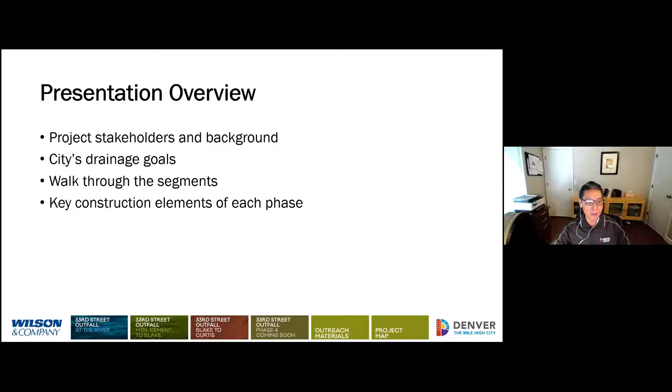There are numerous stakeholders for this project, and also a large number of project team members who made this project success and possible.

Drainage deficiencies were identified in the 2009 Denver Storm Drainage Master Plan. As you see on this drainage map, the total drainage basin is about 4.5 square miles. This map has basically 2 main basins: one is Lower Platte Valley, on the lower half, and the other is the 36th and Downing Basin, on the upper half. The basin is basically fully built out, with older residential neighborhoods in the upper basin and commercial development in the lower basin.

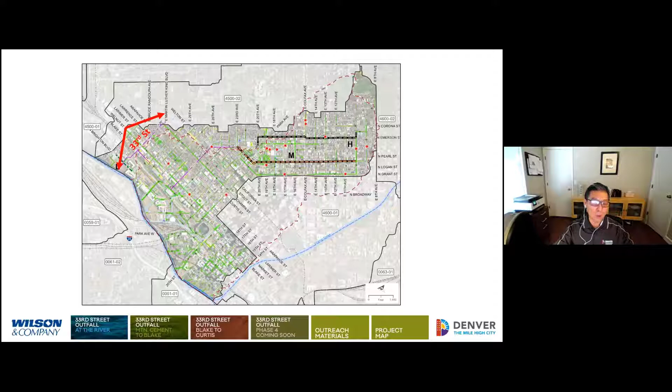As you see on this slide, some of the existing outfalls are 100-year-old brick systems, which are relatively deep. The detailed brickwork is quite impressive, and they're in very good condition, but they are majorly undersized for today's flow requirements.

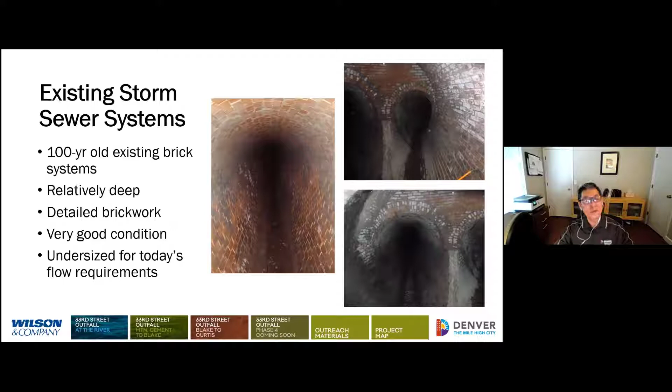Every project has a goal, and this project is no exception. The goal for this project was to adequately address the areas where significant flooding occurred, and to upgrade the level of drainage system service to a 5-year capacity.

The challenge was how to determine the overall most feasible outfall alignment navigating through the heavily urbanized streets.

The drainage capital improvements were proposed again in the same Denver drainage map, and several major outfall interceptors were primarily recommended because the existing lateral network was already established. As a result, 33rd Street outfall was selected as one of the major outfalls.

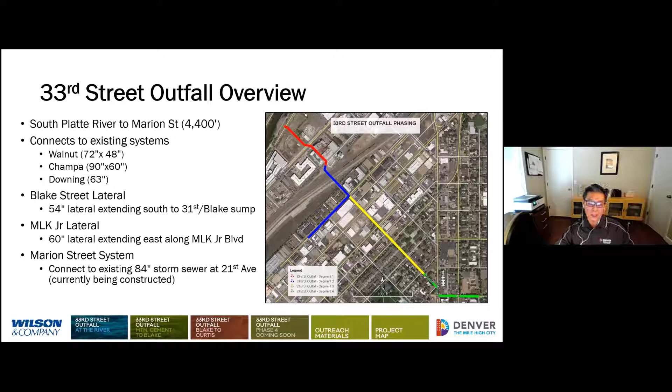In the next slide, Jeff will talk about some of the components and challenges for each phase of the project. Thank you, Steve. Yes, as Steve mentioned, the 33rd Street outfall ended up being the optimal corridor for improvement of the drainage configuration for the basins north of downtown.

That included an extension of the alignment from the South Platte River to Marion Street, about 4,400 feet of corridor. This alignment allows us to connect into 3 different existing storm sewer systems along Walnut, Champa, and Downing. These are all existing brick systems that we were able to intercept flow from prior to it reaching the existing outfall location.

We also had a lateral along Blake Street and Martin Luther King Jr. Boulevard. These laterals were critical to provide relief for some sump areas. Ultimately, the 33rd Street outfall connects up to an existing 84-inch storm sewer using the Marion Street system, which is currently in construction.

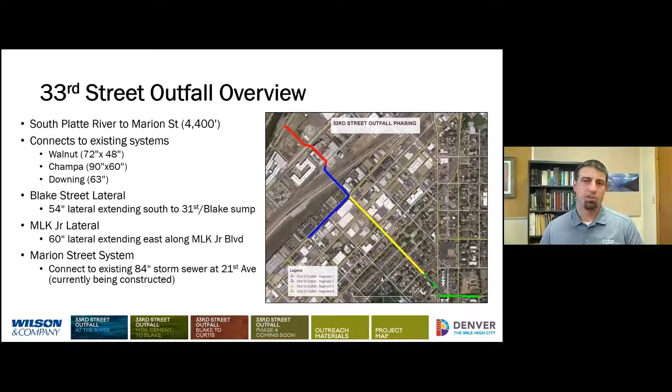The overall project corridor includes a wide variety of conduit sizes, and the primary conduit for the outfall was a 10 by 8 or 11 by 8 box culvert.

We also had combinations of other sizes to allow us to widen and have a shorter structure where cover issues became a concern. We also had a 10-foot diameter Hobas pipe, which is unique in itself, a centrifugally cast fiberglass mortar pipe.

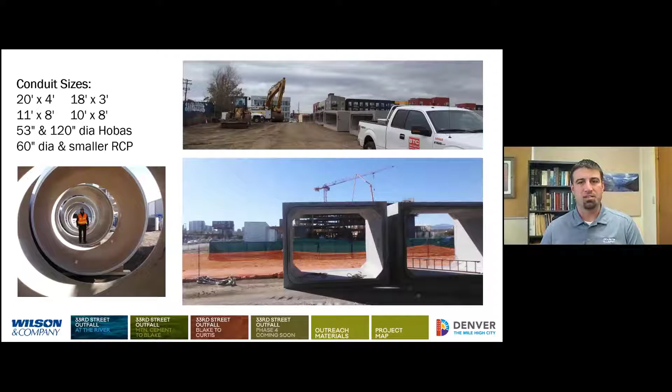That pipe was used for this project in some locations where we had both open cut and, primarily, tunneled sections. Phase 1 of the outfall starts at the river and extends upstream to the Union Pacific Railroad. This area crossed several private parcels, a lot of commercial development, and large residential apartment complexes, which was certainly an obstacle in terms of timing and potential conflicts with existing development ongoing through the area, adding challenges for construction and changes throughout the corridor almost daily.

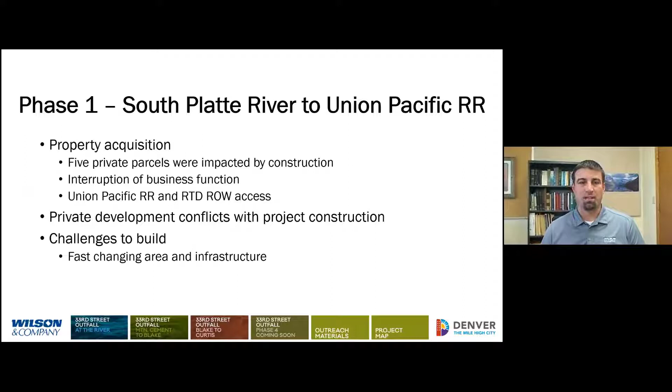As we started at the outlet of the conduit to the river, it was a great partnering opportunity for the city to partner with Mile High Flood District, and the district really took on management and funding of an outfall structure.

And they worked with some of their key partners, Muller Engineering, Stream Design, and Pinyon Environmental, to facilitate construction and design of that outfall.

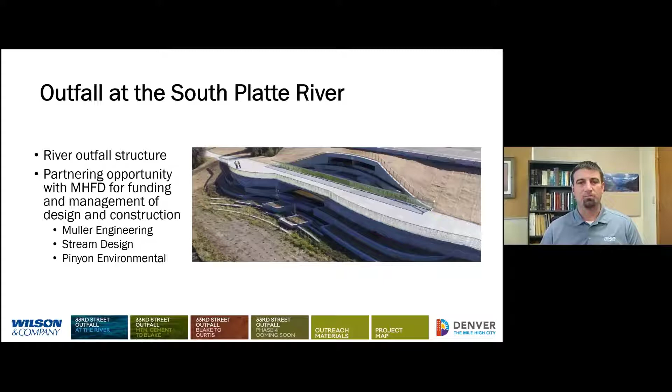As we worked upstream, one of the main construction constraints, which resulted in a large vertical difference between the outfall elevation and the river, were two sanitary interceptor sewers. These sewers vertically were just not able to be crossed under, so we looked at an alternative to raise Arkins Court in this location and actually cross above these sewers after they had been protected.

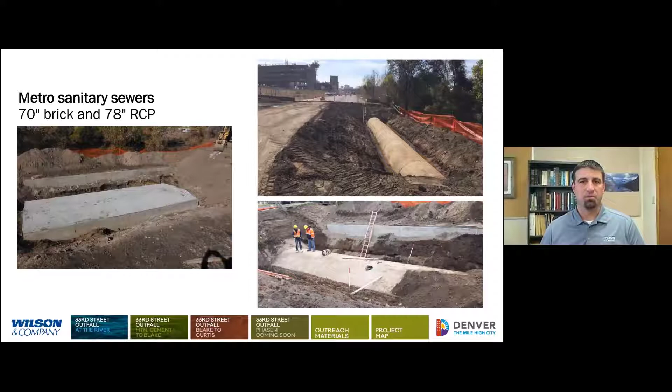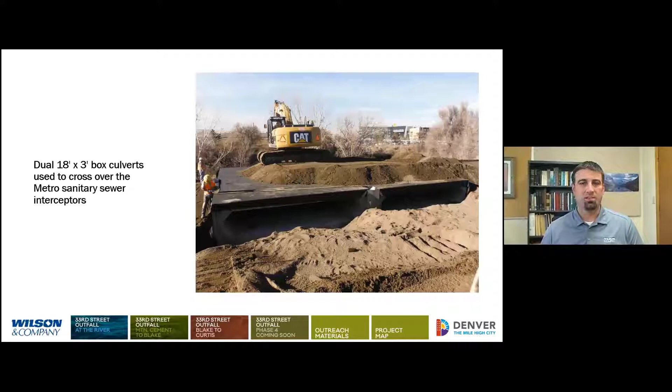To cross over the sewers at this location, the outfall conduit transitioned to a dual 18 by 3 box culvert structure. This allowed for a wider and shorter structure to discharge to the river, and also allowed flow to dissipate and spread for easier energy dissipation at the outlet structure.

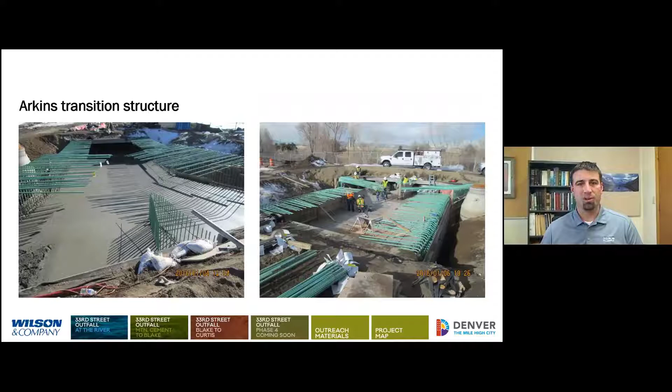As we worked upstream from that transition, the Arkins transition structure was a combination transitioning from dual 18 by 3 boxes into a 20 by 4 box culvert. This was one of our first transition structures along the corridor, with a very large footprint to provide a smooth transition and a very shallow cover condition.

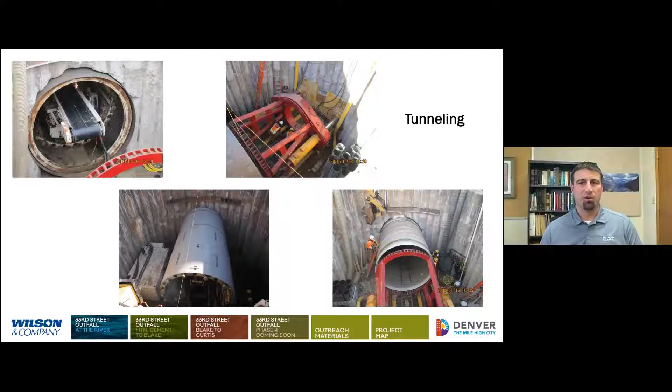As we worked further upstream at Brighton Boulevard, we began one of our first open cut and tunneling segments. This tunneling segment had a 10-foot diameter Hobas pipe that was jacked from the Brighton jacking pit to the east, constructed along a very narrow private development corridor.

The impacts of working through this type of corridor meant the contractor was very tight on space. We had a 30-foot easement in place due to limitations on existing structures, and also the planned construction of a hotel. So we had a tight corridor as well as a very narrow window of opportunity to get this alignment constructed. The contractor did a great job working with the city to make sure this was accomplished.

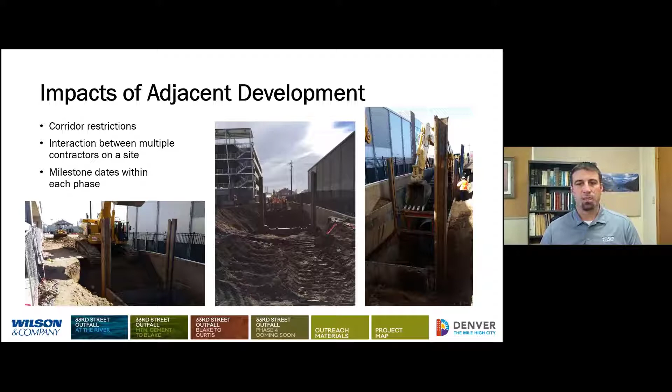As we worked through this corridor, the contractor was able to utilize the slide rail system as a big benefit for construction of this large conduit at depths of 18 to 25 feet through the majority of the outfall. The slide rail system is an active shoring system with rails driven in, and slides placed between the rails as excavation occurs, then advanced down as material is removed from the trench.

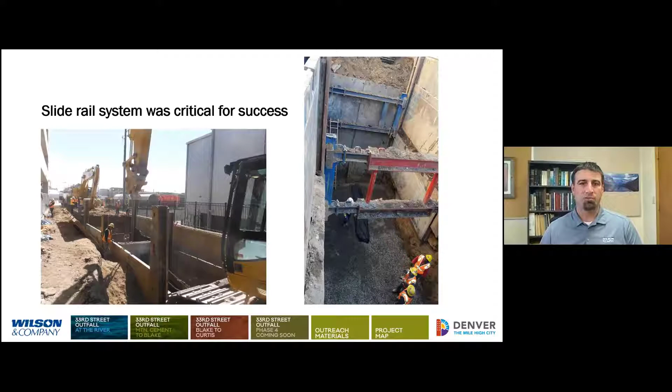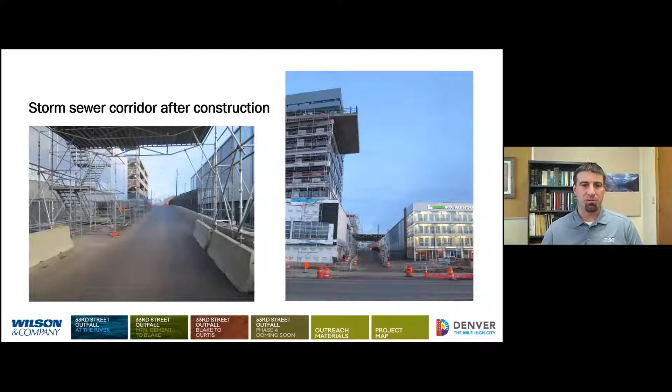As we moved east, phase 2 of the project included extension from the Union Pacific Railroad to Blake Street, including crossing under the railroad. This segment has four individual tunnels and was unique in terms of working near the Coors Field north entrance parking lot. It also was an area where public involvement and outreach became critical as we worked around apartment complexes and smaller individual businesses. These challenges included delays in getting permits in place from both the rail and other entities throughout the area.

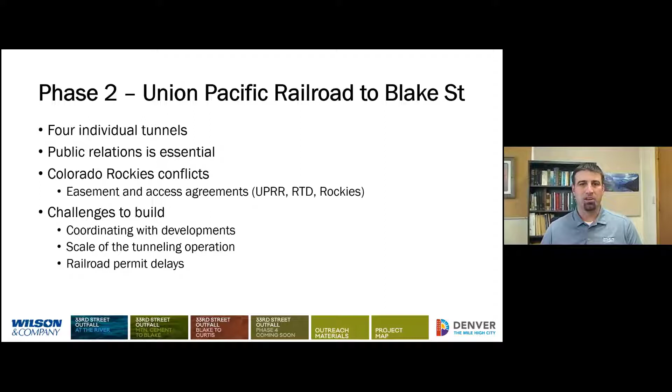As we worked on crossing the railroad, the first component was for the contractor to construct a jacking pit for the tunneling operation. This was a large structure that allowed for placement of rails and jacking equipment to extend the 250-foot tunnel underneath the railroad.

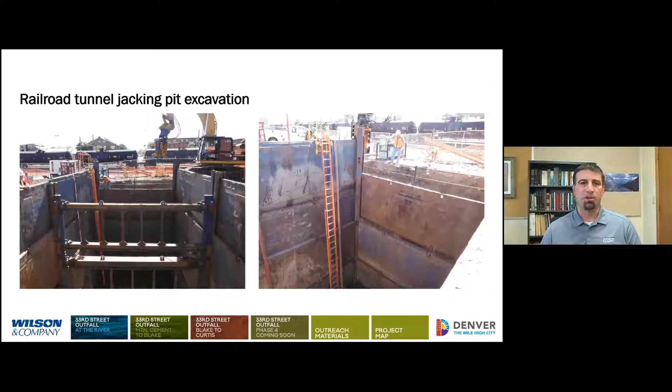The first step in that tunnel system was to provide a grid of horizontal bores. Nine horizontal bores were extended out along the tunnel alignment, primarily focused on identifying any potential obstacles or material that could cause a delay to the tunnel, or potentially a tunnel failure.

Ultimately, two 12-inch steel pipes were also inserted along the bottom portion of the pipe as guides, and that 10-foot diameter tunnel was advanced using those rails as guides for steering. The tunnel ultimately extends 250 feet across the railroad.

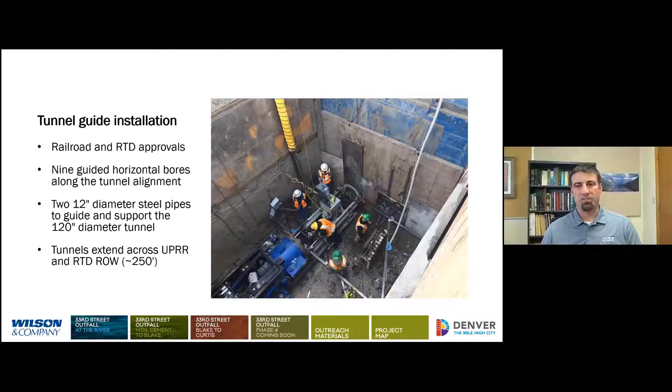The tunneling head was made of two individual pieces formed together in the tunneling trench. As they were advanced, sand shelves were provided on the tunneling head, and hand excavation was utilized to remove material and place it on a conveyor system located within the tunneling heads themselves.

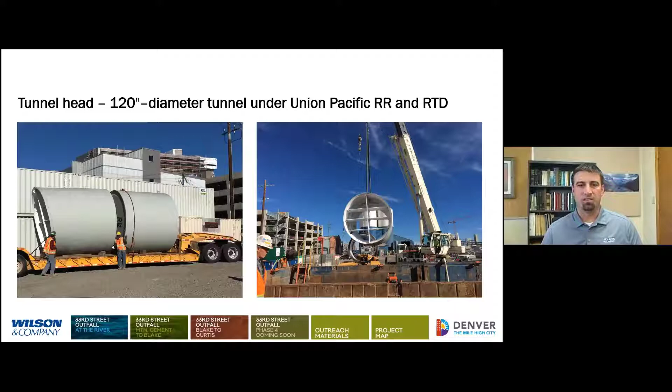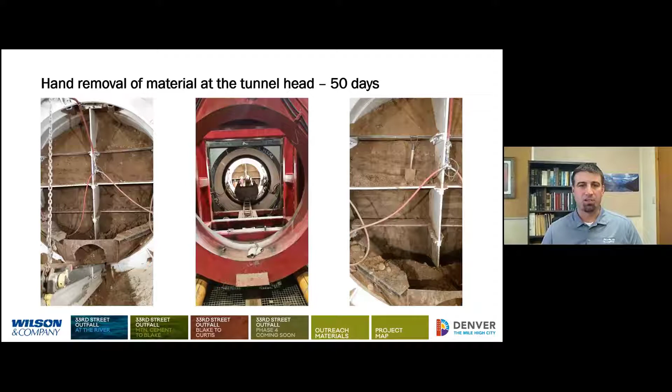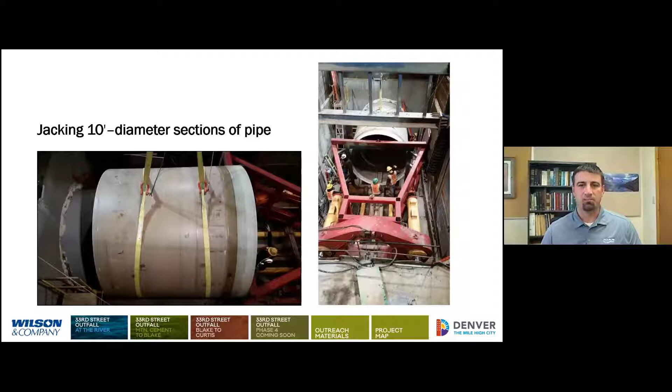As we extend the outfall further east, we cross Blake Street. Blake Street is a major corridor, especially for commuting in and out of downtown Denver, and with this corridor were a lot of conflicts with utilities. Construction of an open cut across Blake Street was not a feasible approach, and as we worked through design, we determined this was going to need to be a tunneled section.

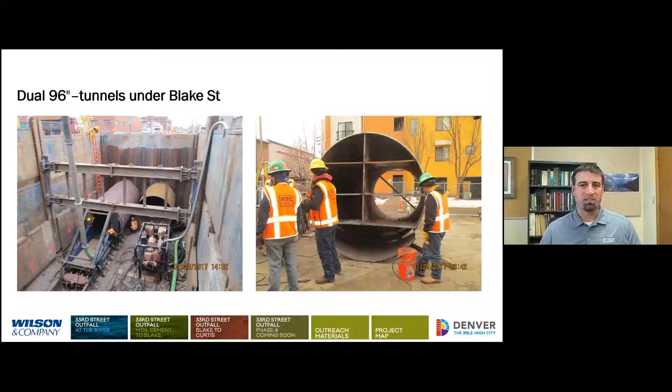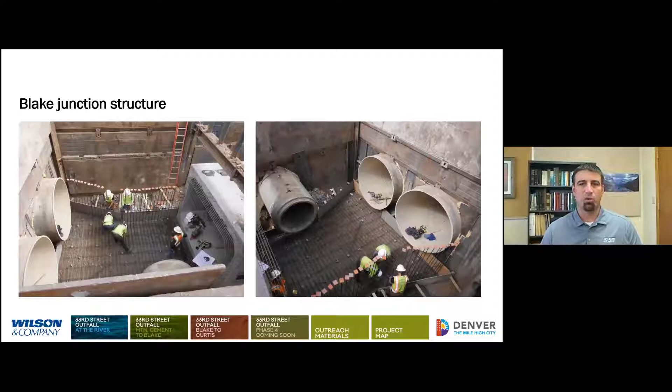On the east side of Blake Street, we had a junction to transition from a 10x8 box culvert to the dual 8-foot diameter tunneled pipes. We also had the connection of a 54-inch lateral system for the Blake Street lateral. The receiving pit for this jacking operation was then able to be utilized as shoring for a cast-in-place transition structure.

Along Blake Street, we also had a segment of 53-inch Hobas pipe that was micro-tunneled. This is the configuration of a micro-tunnel head, and the head being advanced is shown in the right photo. Micro-tunneling is a closed-face system, so the slurry of material is removed from the operation and run through a processing plant.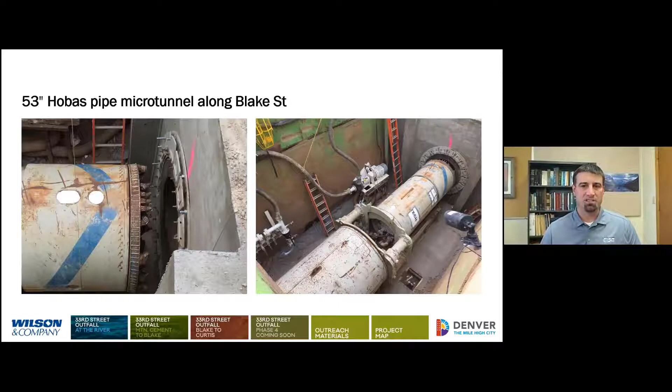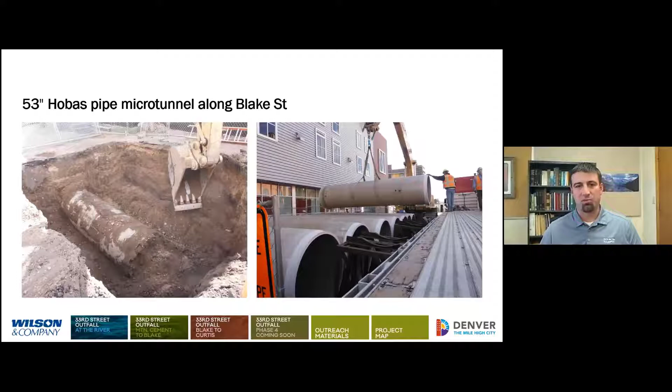The tunneling head on the left is being removed from the end of the microtunnel by the excavator at this point. We were able to advance the microtunnel along the corridor because the adjacent buildings had been constructed after the project was already out to bid. That very tight setback was a limitation for the project, but the contractor was able to make that adjustment and utilize the microtunnel to keep the project moving.

As mentioned, communication for the project was very critical. We had a public relations consultant on our team who worked to update the community, provided feedback at meetings, and also updated and communicated with the city for updates to the city website.

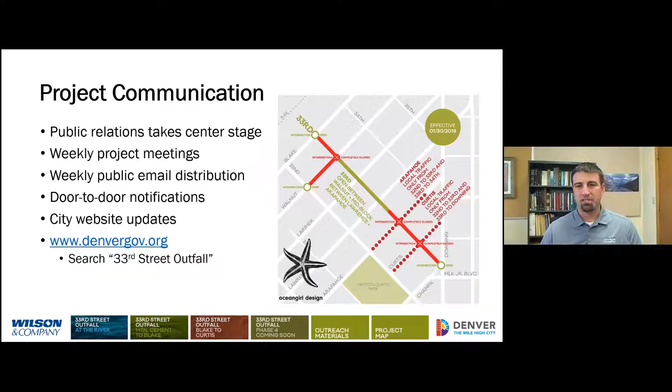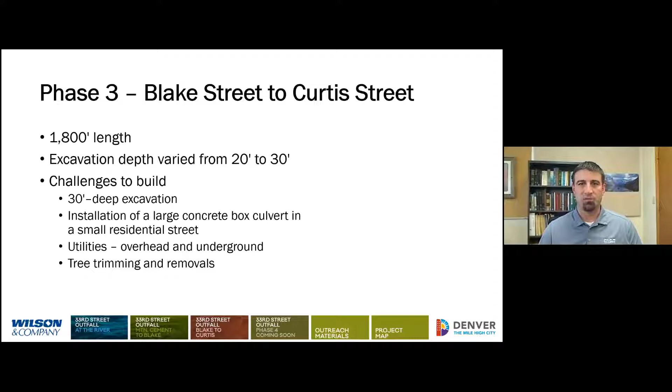As we extend further up the corridor, Blake Street to Curtis Street was the phase 3 segment. This was the longest individual segment of the project, and primarily a straight box culvert installation. The main variation here was that this corridor was extended up to 30 feet deep, making it the deepest segment of excavation we encountered, and certainly a challenge for the project.

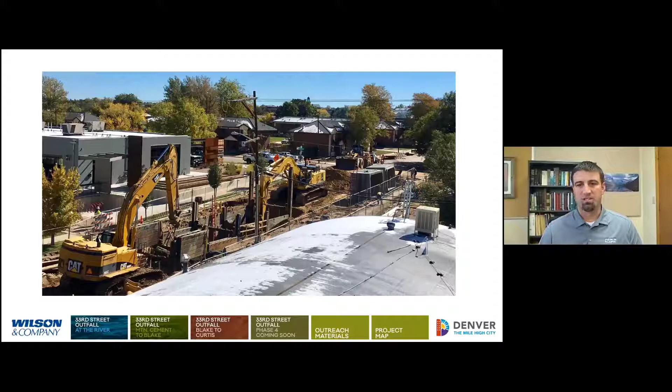As we worked along the corridor, the contractor was able to advance the slide rail system, using a series of components and two excavators, and ultimately a crane, to lower the box culverts in place. You can see the large box culverts on the right side of this photo. This operation was made most efficient with the use of a crane to lift components into place and move materials around.

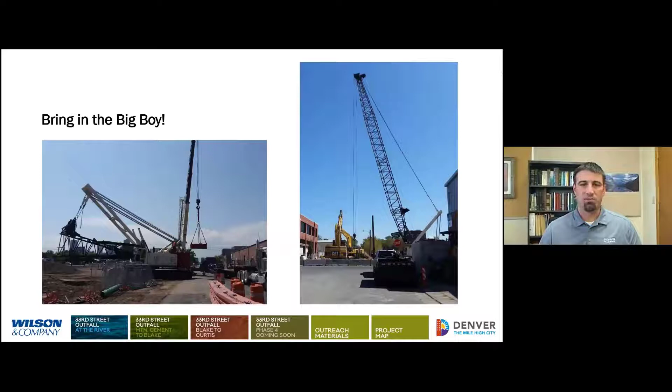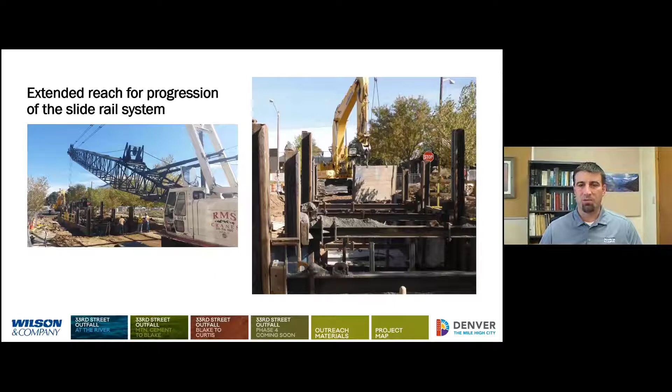This large crane was a huge benefit for completion of the slide rail system. Progressing the slide rail requires a long reach, and the excavators just don't have enough reach for the entire system to work together, including both box placement and slide rail advancing. The crane can move material at a further distance and place those boxes, and then excavators were able to pick up where the crane left off and finalize everything into the final configuration.

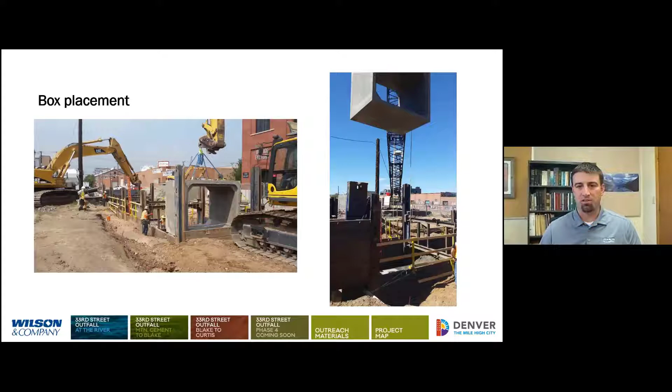As we worked along this corridor, that 30-foot deep connection was a major challenge. As the contractor removed the upper 3 to 4 feet of roadway and subgrade, they were able to install the slide rail system, work around utilities, and progress that slide rail system up the entire corridor. Once they got into a rhythm, they made great progress and moved through this corridor very efficiently, with a lot of material removed and cycled through for this trenching operation.

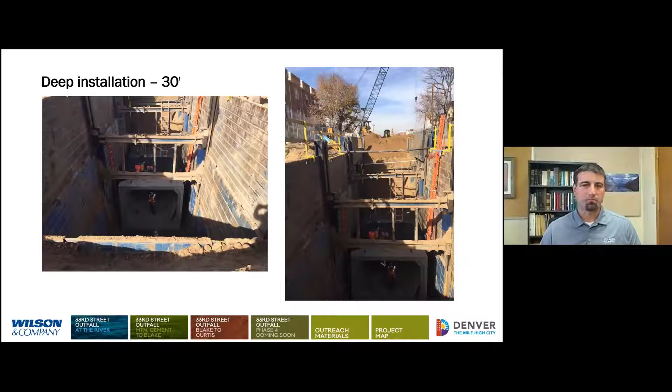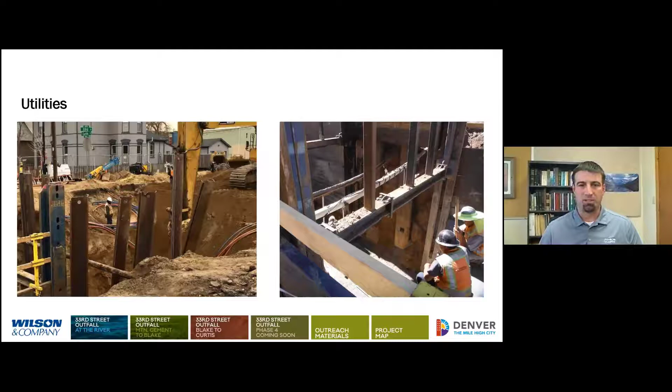As utilities are encountered, there are some configurations on the slide rail where gaps are able to be left in that slide rail, and then additional rails installed. Where those gaps for utilities are installed, sheet piling or H piling was also utilized for that shoring to make sure those utilities were protected and supported.

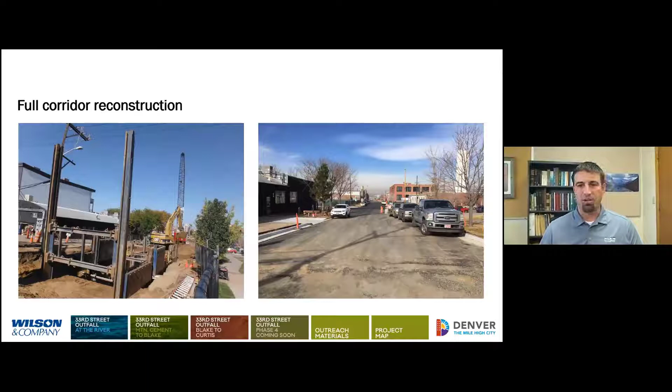As I mentioned, as we work through this corridor, it's a full reconstruction. So we had an entire roadway section reconstructed, curb and gutter, driveways, sidewalk, ADA ramps along this entire stretch of 33rd Street.

Finally, as we work up the corridor, phase 4 was the final phase of the project, including a segment from Curtis to Lafayette Street. This included a lateral along Martin Luther King Jr. Boulevard, and then major storm junction structures at Champa and Downing Street. The main structure is the Downing Street structure, and this includes crossing of a 33-inch sanitary sewer.

Crossing at this location is critical because the sewer had to be suspended to bridge across the excavation during the entire time that they were working on that excavation.

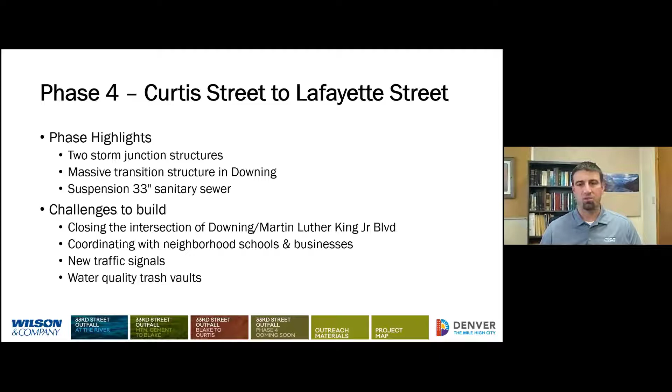The total construction in the Downing intersection included a 10-month window, and this included closures, working with businesses and schools in the area for timing, and also included new traffic signals at the intersection.

We also included trash vaults along Downing, or down Martin Luther King Jr. Boulevard. These trash vaults were really for removal of floatables, and so they were offline structures configured to remove floatables from the storm sewer.

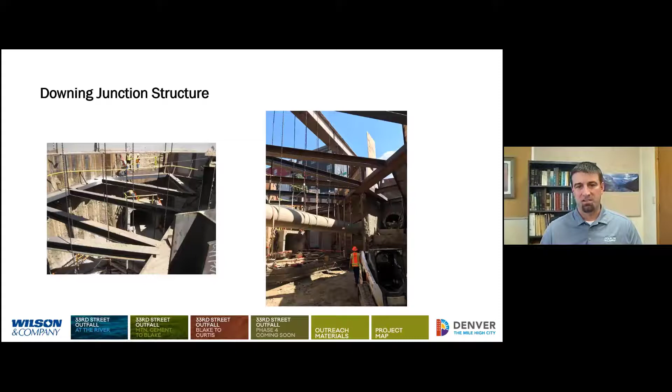These photos are some excavation of the actual system in the Downing intersection and the actual structure. It's a massive excavation of sheet pile and I-beam supports spread across that entire excavation. And then, as you can see in the right photo, suspension of that 33-inch sanitary sewer.

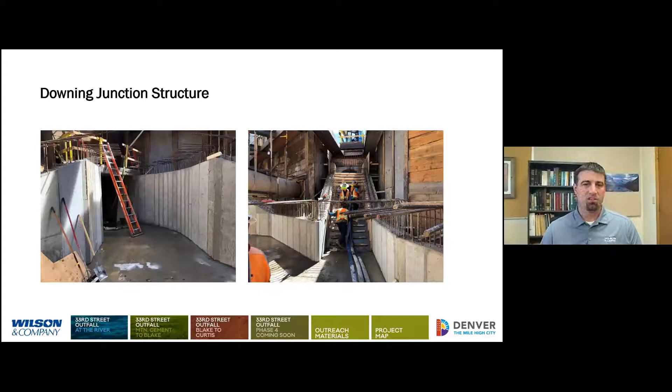In the photo on the right, you can see the vertical at the top of this ramp is a 63-inch storm sewer that had to be transitioned down to intercept the invert of the 33rd Street outfall. At this location, the outfall transitioned down to a 20-by-4 box culvert underneath the sanitary.

There was a lot of forming and an extensive amount of concrete work through this structure to accommodate and accomplish this configuration. Really a massive feat, and we'll show you a video later that takes you through the entire structure construction. This was a big accomplishment by the contractor, and certainly had its own risks as well. The contractor did a great job being able to accommodate that.

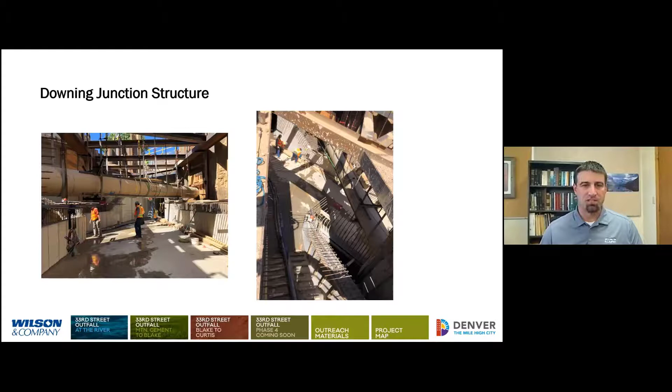And as we move through that, I want to toss it back to Steve to wrap up a few highlights from the city's perspective for the project and close us out.

Thanks, Jeff. Well, the last phase of this project was completed in December 2019. Constructing the entire project in 4 phases over 5 years cost Denver over $40 million. That's a lot of money we talk about here.

The drainage service, the level of drainage service was brought up to the 5-year capacity. And that was one of the project goals that I mentioned earlier.

And we ran a FLO-2D analysis, and that analysis indicated that for the most part, the inundation flow depth is 12 inches or less at the flow lines on the streets, meeting the Denver storm drainage criteria for a 100-year storm event.

This project was crucial to make sure that city, engineer and contractor were on the same page, and a huge amount of collaboration has taken place.